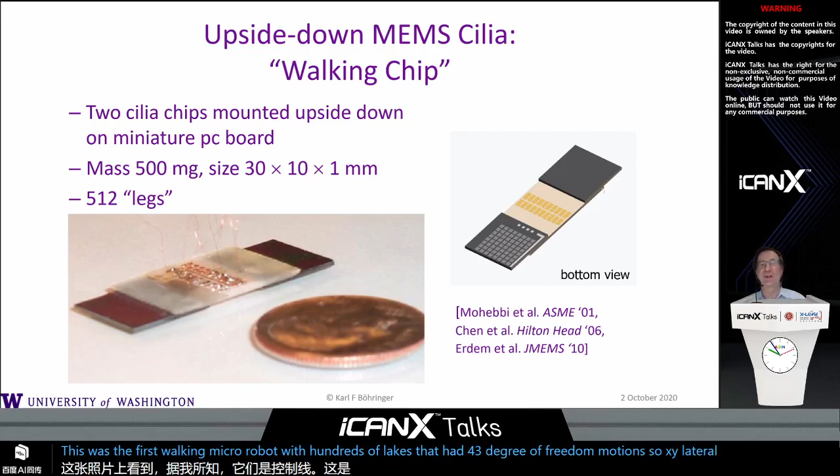How does this look like? Well, here is a little video, and you just see one corner of this robot, and you see a few of its legs, and here you can see how it's sort of crawling along the surface. It's a polished silicon surface, so you can see the reflection as well. And with these hundreds of legs that are moving in a coordinated fashion, the robot can move to the side. It can also move in the opposite direction and rotate and reposition itself.

Now, I mentioned earlier that some of these micro manipulation tasks don't really need any sensor feedback, but I wanted to take this one step beyond that and go to self-assembly. Now, I'm not a chemist at all. We saw some great work earlier in this session on self-assembly at the molecular scale. We're doing something a little bit more, should I say, crude, with silicon microchips that are usually in the size of hundreds of micrometers, possibly down to tens of micrometers.

But you can create a template where slots represent essentially the minimum energy state. And then when a wave of parts is moving over that surface, then these parts get captured in these sites and then assemble into a predictable pattern. So in this case, we have about 200 sites that capture parts.

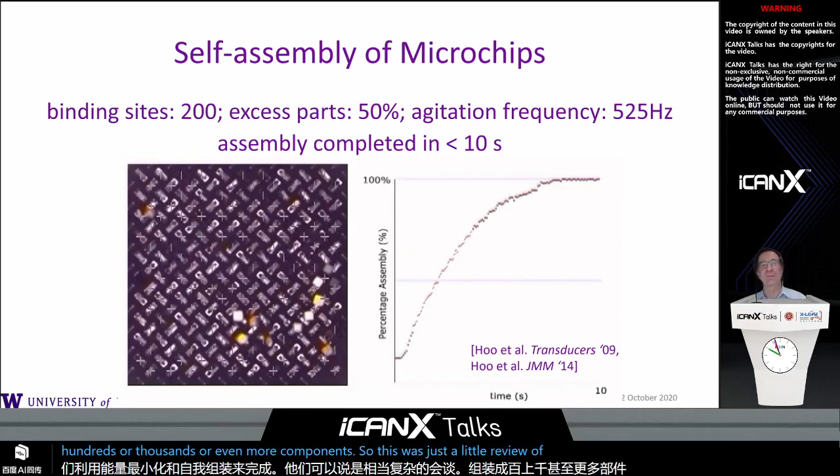So this was just a little review of some earlier work, but I think it created some of the motivation for the work today. But what I've shown you so far was work with solids and how they interact at the small scale. But for the rest of the presentation, I want to talk about the interaction between droplets and solids, so liquids and solids at the small scale.

And probably many of you have seen pictures like this before. So the lotus effect, the lotus leaves, which have this amazing property that they repel water, say, a raindrop that falls on it, and it creates this really almost perfect sphere of water that can roll off the leaf very easily. So, like many other groups, we've been fascinated by this effect, and others before us have studied this in a lot of detail, and I think there is a very good understanding now of what makes this work.

Well, if you zoom in on the surface, then you see an almost fractal-like structure of roughness. You see features that are in the tens of micrometers or in the micrometers, and even the smaller scale that makes the surface very rough. And this roughness really enables the super hydrophobic property of the surface that basically limits the amount of interaction between solid and liquid. So most of the droplet is really suspended in air, and only very few points make contact with this microscopically rough surface.

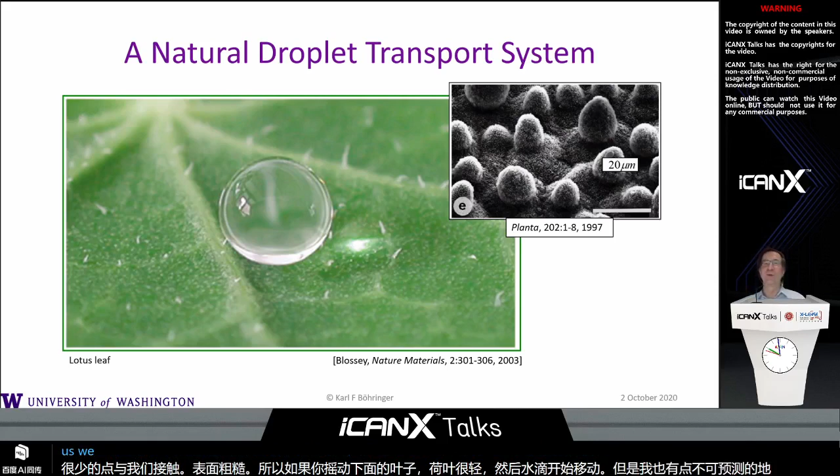So if you shake the lotus leaf just slightly, then the drop starts to move, but it's somewhat unpredictable where it would move to. And maybe in nature that's okay, but of course for us, we would like to have more control over how we move and manipulate the drops. So what we really would like to have is something like in this picture here.

The most fundamental principle or task here is how to move a drop from a point A to a point B. How would this work? Well, in general, you need some kind of gradients. You need some energy landscape that moves the drop from one position to another. So in this little animation, you're moving from the higher energy point to the lower energy point, following the gradient.

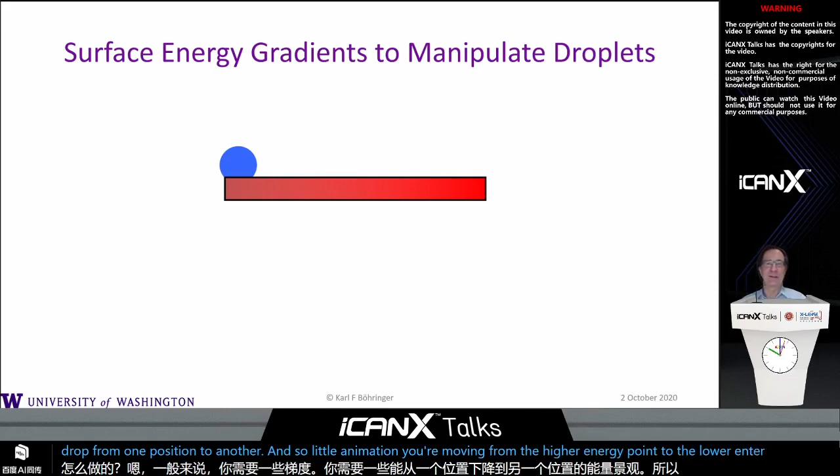Now, how can you do that in practice? Well, there are many different ways how you could create a gradient. And here are just some of the examples. And again, great work that in some cases really dates back many years. Like in this case from George Whitesides' group, almost 30 years ago, he showed that he can make drops move uphill. Now, why does that work?

Well, because there is an energy gradient, or really a surface chemistry gradient, where the lower portion of the slope is more water repellent than the upper portion of the slope. And there is sort of a gradual change of the surface property in between. So if you put a drop on the surface at the lower end, then the overall energy balance gets minimized, even though you work against gravity, but still the water is moving uphill.

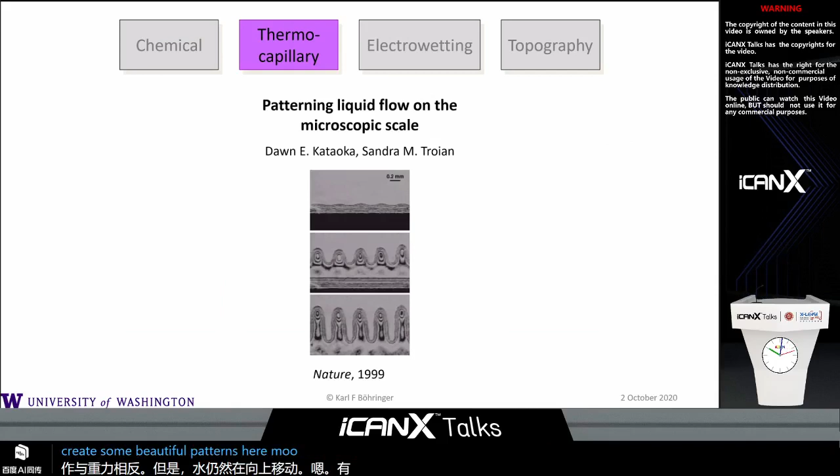There's some great work back then, Sandra Troian at Princeton, who worked with thermocapillary effects to create some beautiful patterns here of moving mixtures of liquids in different directions. And then, of course, there's work from Duke and also from other schools on electrowetting.

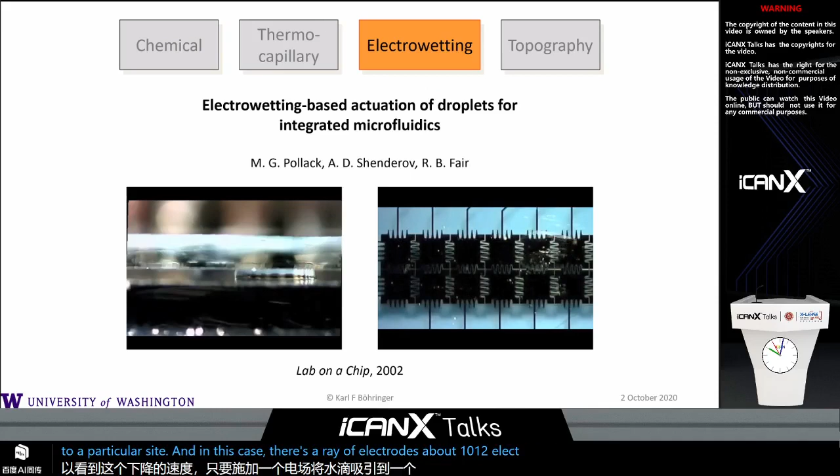So applying a voltage creates locally a different energy landscape that again moves the drop in a particular direction. Here is a side view in this video, and hopefully you could see that in a short sequence. Here is a top view, and you can also see how fast this drop can be moved around just by applying an electric field that attracts the water drop to a particular site. In this case, there's an array of electrodes, about 10, 12 electrodes in the field of view here, and you can very quickly switch between them.

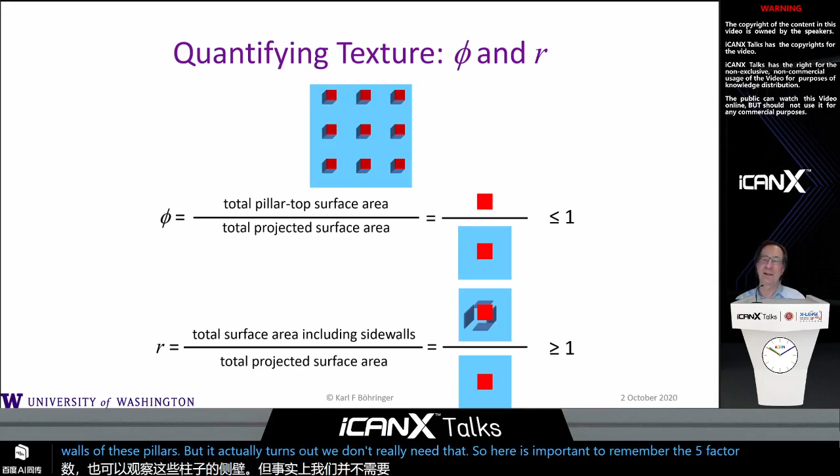If it's close to 0, it's like a bed of needles or a bed of nails. If it's 1, then it's a flat, smooth surface. So we're basically operating between 0 and 1: for 1, a flat, smooth surface, for 0 or just a little bit above 0, a very spiky surface. There's another parameter that also looks at the sidewalls of these pillars, but it actually turns out we don't really need that. So here it's important to remember the phi factor, because we need that later when I come back to my Young's equation or modified Young's equation.

Here I'm looking at the apparent contact angle. So remember from Young's equation, we had an angle theta that we calculated from the surface energies. And now I'm asking, well, what happens when I put a drop on a rough surface? Here's the equation for that. But what does this equation actually mean?

I think if you look at the graphics, it makes perfect sense, because if you have a water drop sitting on top of a rough surface where the water does not sink into the gaps, then you have basically a mixture of water interacting with a solid and water interacting with air. And what is the ratio between them? Well, it's really this factor phi that we were just talking about. So there is a portion of the water drop, and the surface area portion for that is phi, that interacts just like before with the flat surface.

But then for everything else, for 1 minus phi, you have an interface to air. And when you have an interface to air, it's like this perfect hydrophobic area. It doesn't make contact with any solid surface. So there you have a contact angle of 180 degrees. So you can simplify that, and you get an angle that is expressed by this equation, or you can then turn it again into another form.

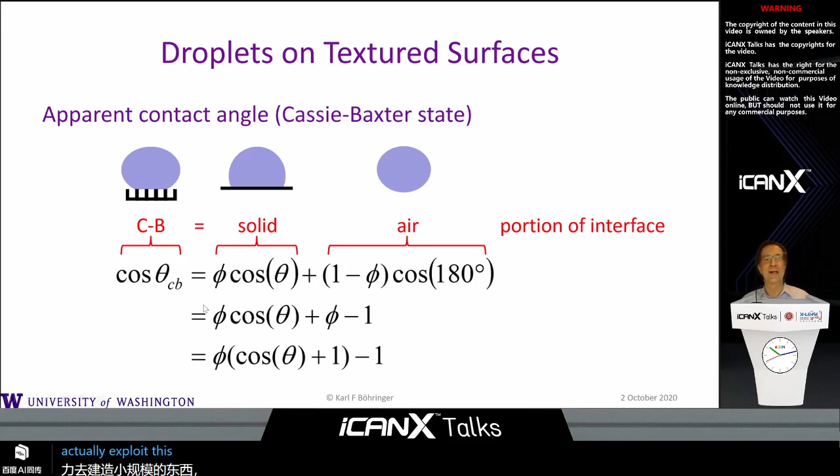Now, the colleagues Cassie and Baxter discovered this simple relationship in this equation. And again, this is many years ago. So this is not new, but now with our capabilities to build things at the small scale with very high definition, we can actually exploit this and build new kinds of systems that take advantage of this Cassie-Baxter effect. Now, I'll show you how this works if you zoom in a little bit more. So here's our Cassie-Baxter state, and I'm going to zoom in on one particular area. And you see the interface here, solid-liquid, and then also liquid-air.

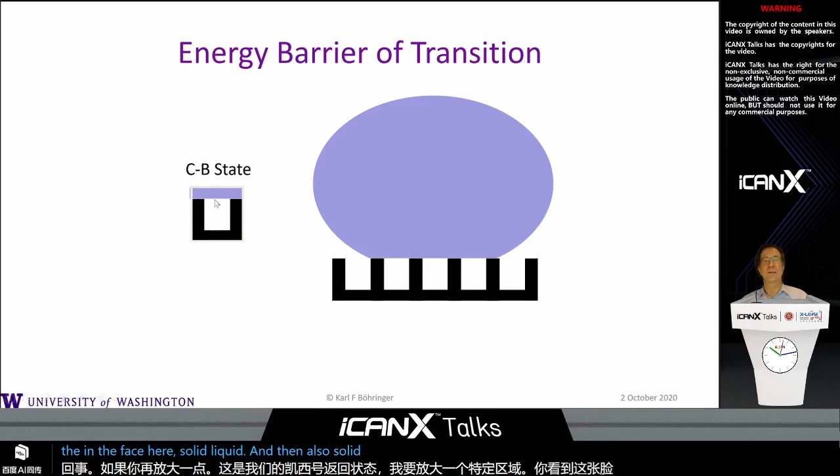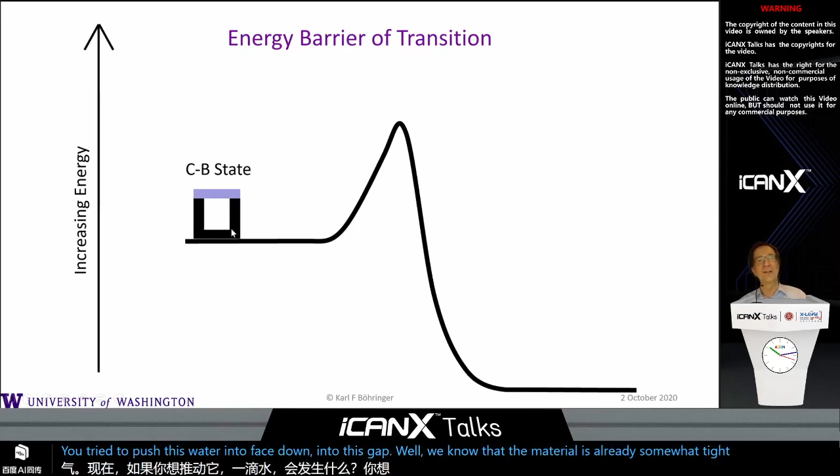Now what happens if you try to push this water droplet, if you try to push this water interface down into this gap? Well, we know that the material is already somewhat hydrophobic. So we have to apply some pressure. We have to exert some energy to push this water into this gap. So there's an energy barrier that naturally, if you let the system sit, it would not attain. It would stay in the Cassie-Baxter state.

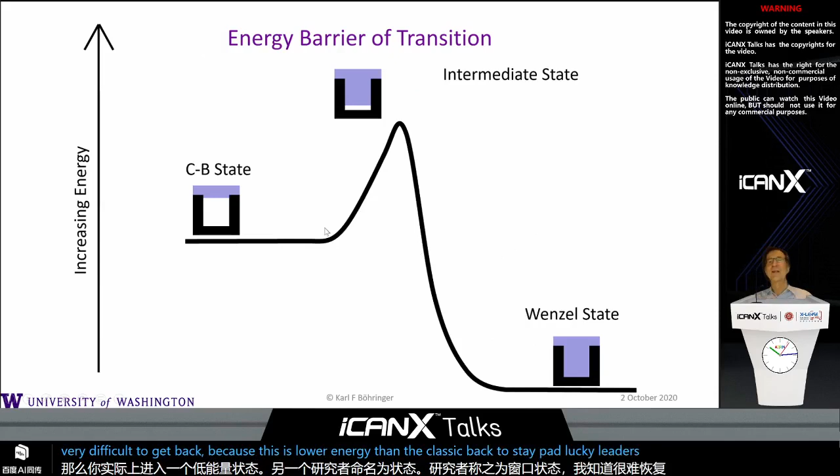But if you completely eliminate these interfaces, so the air-water interface and also the air-solid interface, so you remove the air completely, then you actually get into a lower energy state. And this state is named after another researcher. It's called the Wenzel state. Now, it's very difficult to get back because this is lower energy than the Cassie-Baxter state, but luckily there's this barrier in between. So what I would like to do is to stay on this side of the equation. That's what I will be showing you in the next couple of slides.

So here are just some more pictures. This was done with a goniometer where we actually study the surface contact angles. And here you see the drop sitting on this bed of nails, while here we're pushing the drop into the rough surface, and here we have attained the Wenzel state. But both of these states, Cassie-Baxter and Wenzel, are stable.

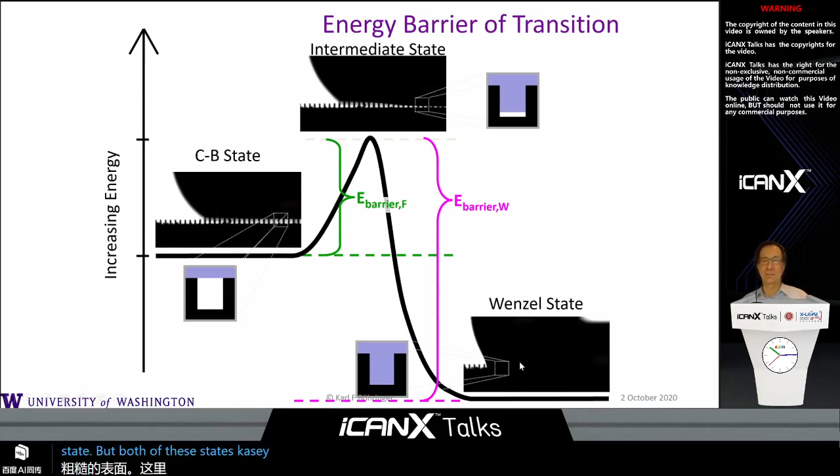And now, again, I want to take this a little bit further, and at this point I'm actually designing a rough surface. Now, what are the tools that I have available? So in my microfabrication facility, I can define these geometries, and I can create pillars that have a certain height. They have a certain geometry with a gap b and an actual size a. So if I look at this geometry, how does this relate to phi? Here's the equation for that. So a squared over (a plus b) squared gives me this parameter phi.

And now remember the equation from Cassie-Baxter. It tells me the apparent contact angle is a function of phi. The theta is, of course, given by the materials. So I can play with phi here. And what happens if I change this from a flat surface to a very spiky surface? Well, I'm changing at the same time this apparent contact angle from the original angle all the way to 180 degrees, at least in theory. In practice, of course, I have to stop a little bit before reaching zero. But this basically tells me a way to make a gradient of texture or a gradient of hydrophobicity on the surface.

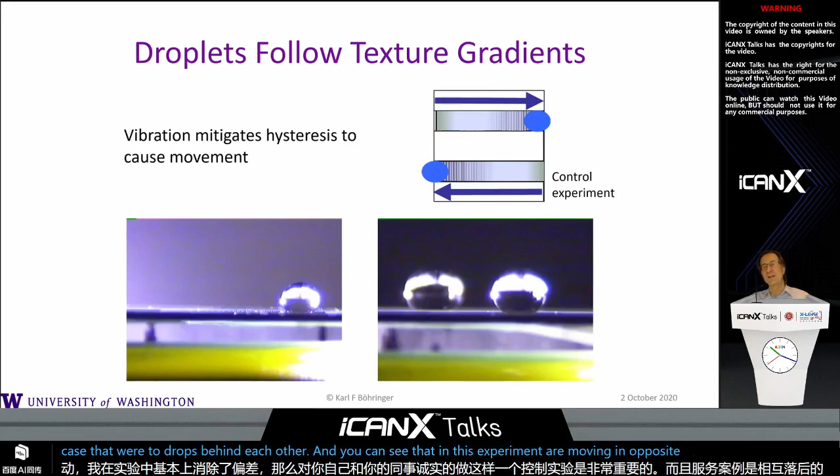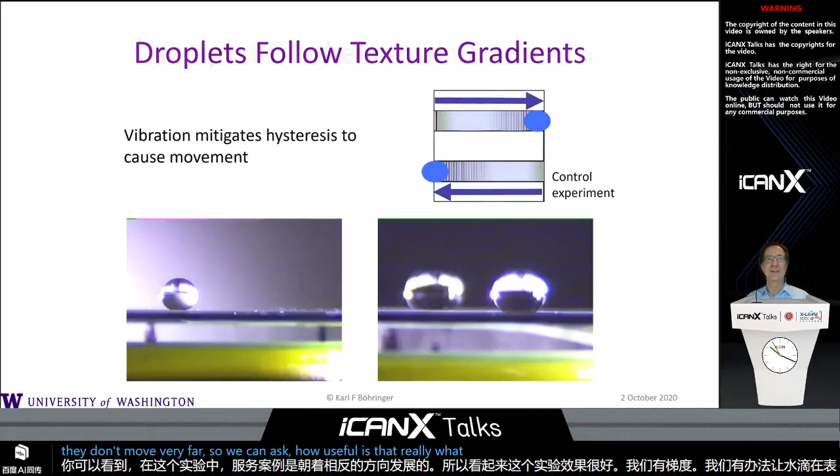It seems like this is working great. We have gradients. We have a way to make drops move on a surface just by texture. But unfortunately, well, they don't move very far. So we can ask, well, how useful is it really, what we've just built here? And this is definitely a limitation of these gradients.

So you first of all have a limited distance along which you can move the drops. And of course, you cannot create anything like a closed loop because, well, that would be against the laws of physics if you want to follow a gradient. So what can we do to improve on that? We can build something like what we've seen earlier from my colleague Heiner Linke, who built this Leidenfrost ratchet.

So we're building a texture ratchet. So we're building lots of small patterns that are like these gradients, but we arrange them in a clever way so that the drop moves from one gradient to the next one, and it doesn't move back. So we give it a bias so that the drop keeps moving along this repeated pattern of gradients, which then acts like a ratchet.

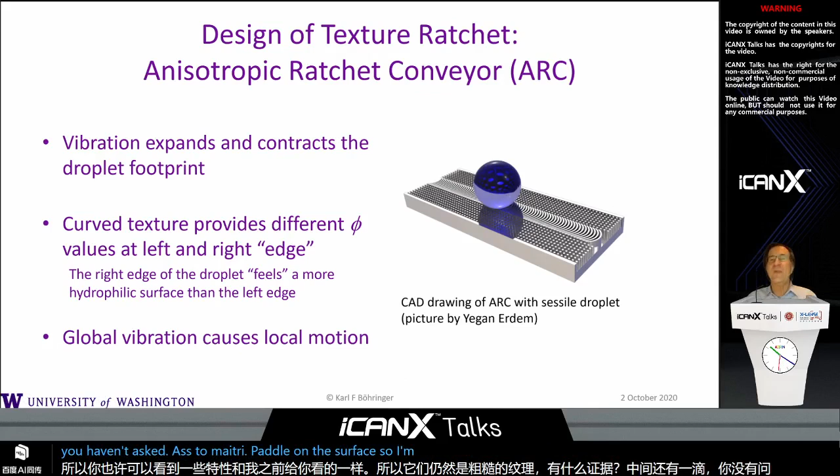Now, how does this work? Here's a video with a high-speed camera, and I very much hope that you can all see that as smoothly as on my screen. But what you'll see here is the vibrating surface and the drop that's sitting on this track. And with each cycle, and we're going at about 50 Hertz, the drop is moving a little bit towards the right. And it's doing that just because of this ratchet pattern on the surface, because of the asymmetry that we've created on this surface.

So you can characterize that, you can study this in detail, and you can essentially see that the front and the back edge, so we call it the leading and the trailing edge of the drop, they basically have some kind of oscillating pattern, but with each oscillation, the drop essentially is taking a step forward. So the asymmetry on the surface is translated into a lateral force, into a lateral motion.

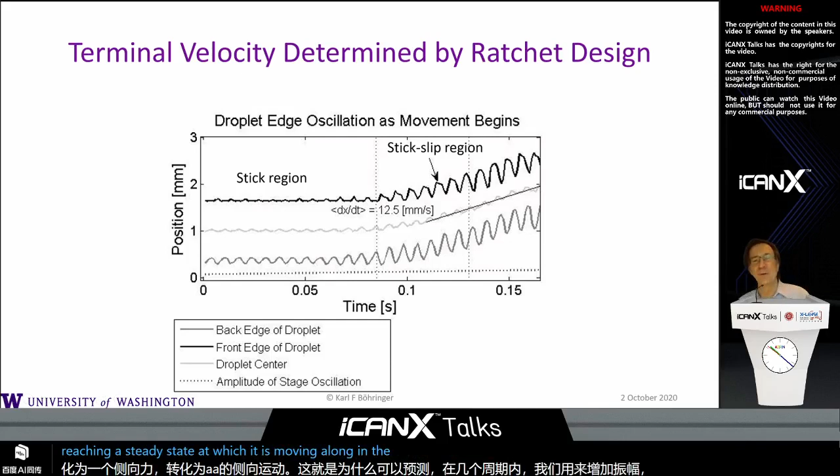And it's very predictable within a few cycles as we increase the amplitude. The drop is reaching a steady state at which it's moving along, in this case, with about 12 millimeters per second. But you can actually do a lot more with this system, even though it's very simple. I mean, you can build this in a few hours, or maybe you can mold it in a few seconds, really, once you have a master mold.

But you can, for example, build systems where different drops can be addressed with different frequencies. So it's well known that drops essentially have resonance frequencies, just like any spring mass damper system. And bigger drops have lower resonance frequencies than smaller drops. So if you use a low frequency, then you can reach drops that are, like in this case, 13 microliters in volume. If you go to higher frequencies, then you can address and control drops that are maybe 5 microliters.

And in this plot, we're characterizing the regions in which the drops are moving. So large drops at about 45 Hertz, the most efficient movement for small drops at about 80 Hertz. But if you have an intermediate drop, then there's some overlap. So there's a capability to address drops on a surface just by using different frequencies. And these pictures show some of these examples.

So the first one shows just moving the 5 microliter drop towards the 8 microliter drop. And then we're changing the frequency and we're moving the mixed drop along that track. So first we do mixing and then some merging with the vibration. And when we change the frequency, we lower the frequency from 75 to 45 and the drops are moving together.

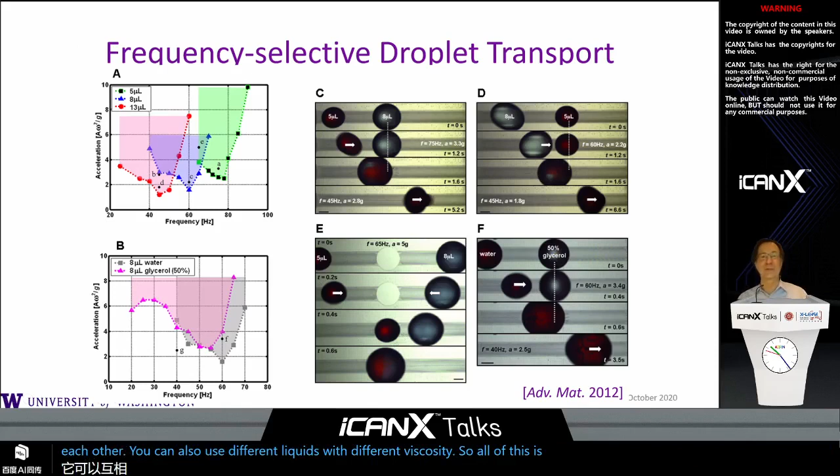Now you can also do things like, for example, what you could think of as some kind of microfluidic circuit where the drops initially move in an asynchronous way. So they're moving at different paths, they maybe arrive at different regions, but then you can modify these regions so that it's a little bit harder for them to move across them. And when you change the amplitude or you change the frequency, then you essentially synchronize the movement of the drops and let them all move on, like in this moment now, that they move together even though they arrived at this site at different times.

So here's another example where you can essentially build a switch for drops. And again, it's the same drop, it's the same pattern on the surface, but in one case the drop turns towards the right, in one case it moves straight, because we're using different frequencies that essentially create different resonances in the drops. And for this higher frequency, the lower frequency, the drop is taking a right turn.

So this was done by my student Hal Holmes. He had some great work on these microfluidic circuits that he's been building. And he's actually now still in Seattle, but working in a startup company and the overall theme of conservation biology.

I think one more example on that, where you can have a selective mixing and merging of drops. So there is an area where drops are joining, but in some cases, like on the left, we're holding back the drop. We let the other one pass, but with a different input signal, we actually mix the two drops together. So lots of these functionalities are all capable on this platform. So very simple platform, only texture and nothing else. Lots of capabilities here in making interesting microfluidic devices.

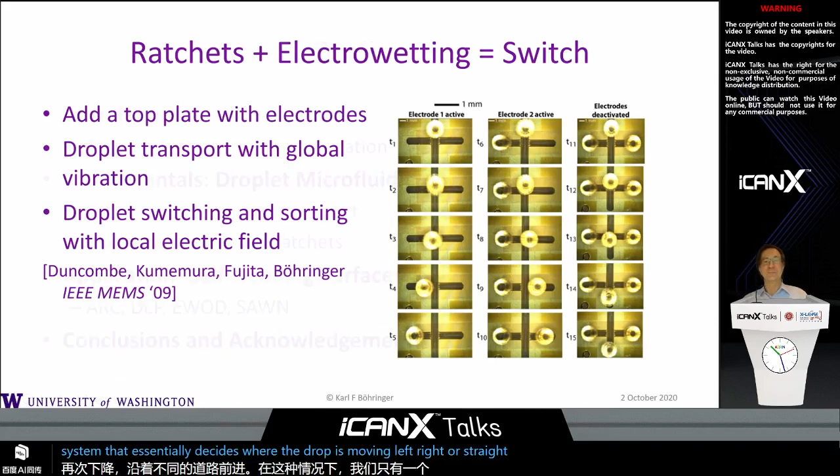And now, these were the fundamentals that I wanted to show you, but now for the remainder of my presentation, I want to talk in more detail about one particular application, and I want to highlight my student Di Sun. I mentioned his name earlier. He worked on this particular application of self-cleaning surfaces, and he was really great. He's been very productive, wrote a lot of papers that actually just came out over the last year, and was also very good at introducing different acronyms into the collection here.

I've already talked about the anisotropic ratchet conveyors, or ARCs. He also worked on electrophoresis or dielectrophoresis, on electrowetting on dielectrics, and on surface acoustic wave nebulization. So all of that was done on the same platform, and in particular, we're interested in exploiting this effect for self-cleaning surfaces. So let me show you what we want to accomplish here.

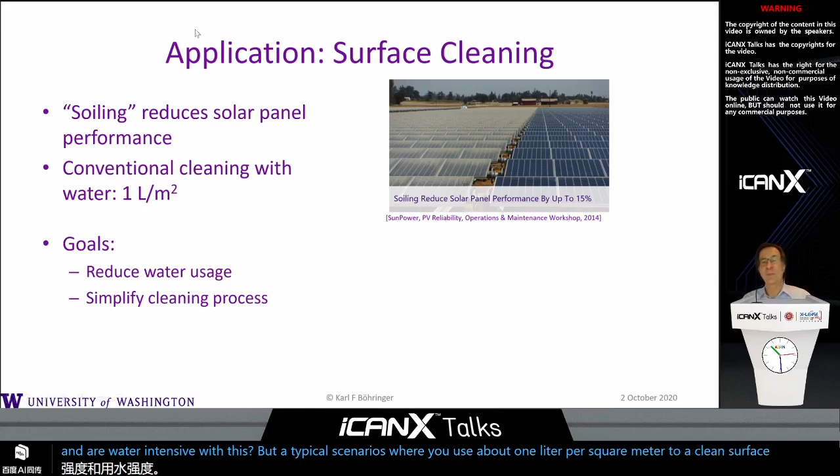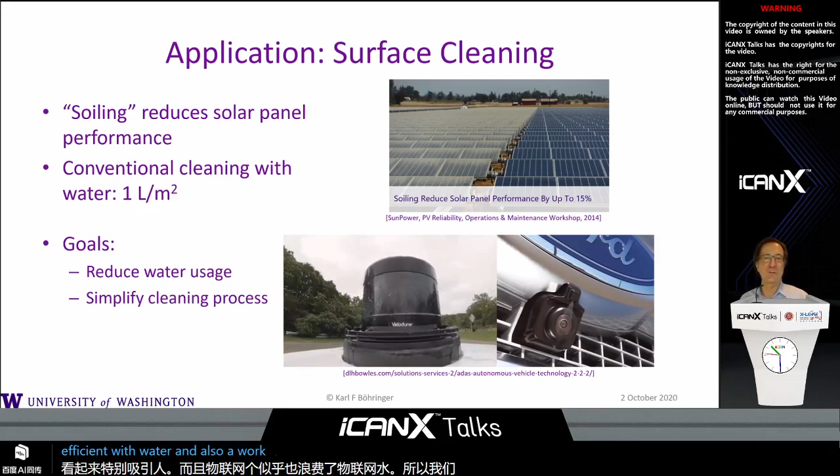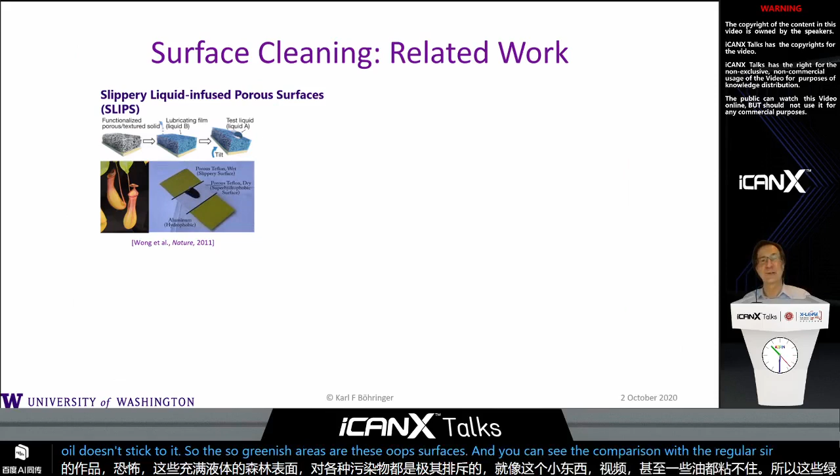How can we do that? Well, first we looked at the literature, and there's some beautiful work out there. For example, the work by Joanna Aizenberg at Harvard that had these liquid-infused porous surfaces that are extremely repellent to all sorts of contaminants, like in this little video where even some oil doesn't stick to it. So the greenish areas are these SLIPS surfaces, and you can see the comparison with a regular surface that is not treated, where the oil is sticking much more.

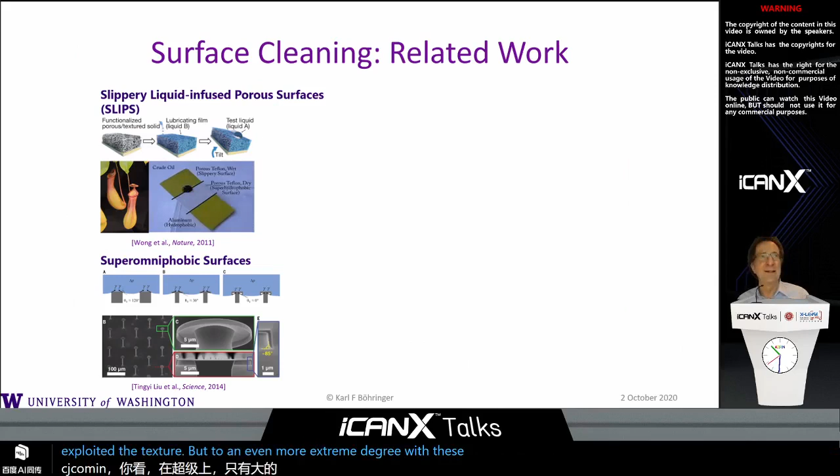Beautiful work also from C.J. Kim at UCLA on these super omniphobic surfaces that also exploit the texture, but to an even more extreme degree with these overhanging, mushroom-shaped features. And then in general, with superhydrophobic surfaces, like here is a product that you can actually buy where a droplet is moving over a surface and essentially collecting the contaminants that are sitting on this wafer. The drop is basically moving in a random fashion, depending on the human that's controlling it.

And then some beautiful work that just came out a few months ago of, again, some textures, some rough surfaces, but very durable ones. And that's really a topic that is very important, especially when you talk about solar panels that are exposed to the elements often for years or longer.

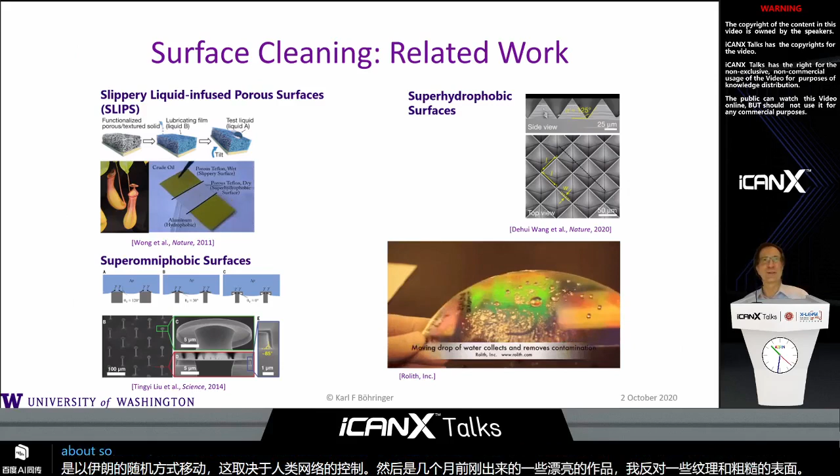What was our take on that? Well, we modified our anisotropic ratchet conveyors and made them flat, at least from an optical transparency point of view, so that we simply made some regions that are more or less hydrophobic, but other than that, the surface is essentially flat. When my student initially proposed that to me, I said, no, that's not going to work. You need the topography, you need the pillars and the physical roughness. But he went ahead anyway, and he came back a few days later, and well, he got it to work.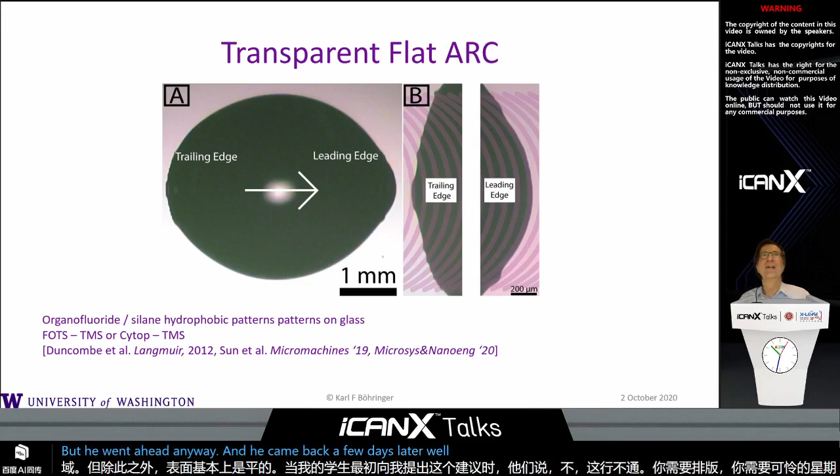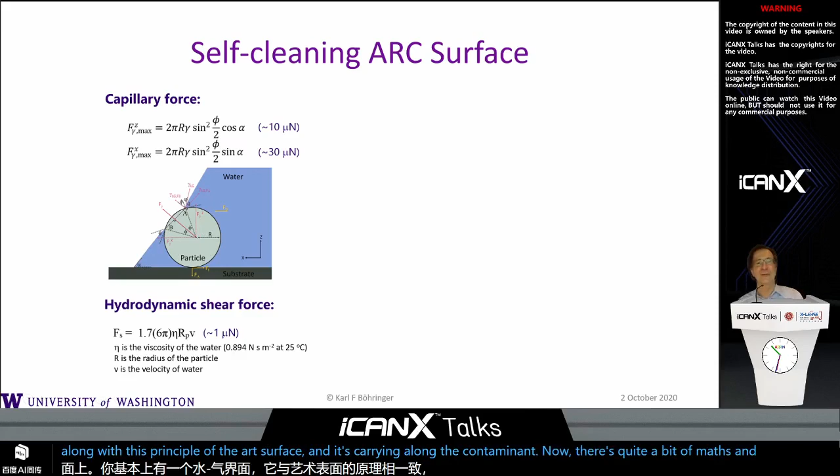This is what we want to do ultimately then, that you have particles sitting on the surface, and on the surface you have essentially a water-air interface that is getting pulled along with this principle of the ARC surface. And it's carrying along the contaminant. Now there's quite a bit of math, some modeling that you can do that I'm not going to go into in detail right now, but the ultimate effect is something like in this video that you're seeing here. This is a 10 microliter droplet, and it's carrying a few grains of sand. It turns out that you can actually load these drops with a lot of sand, up to 50% or more in weight, and the effect is still working, so you can still move the drops along.

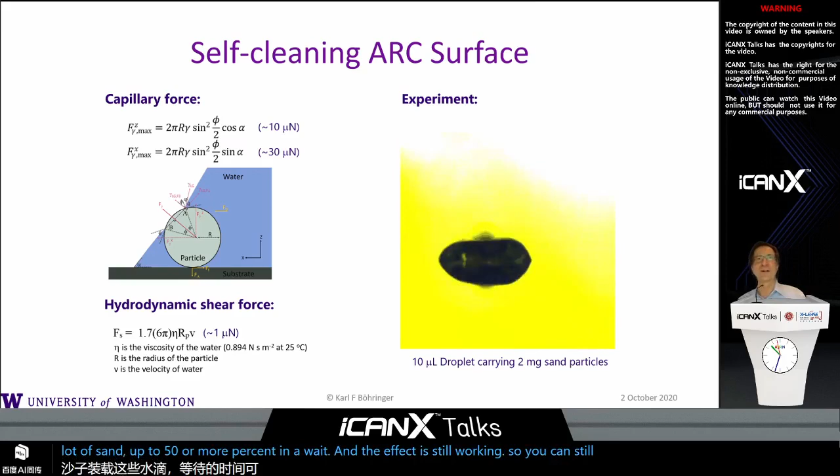Here's the experiment that I wanted to show you, and let's see. The video started with the first experiment already done, but I'll just let it run here. And what you see here is that the drops are following this invisible, flat ARC pattern that we created on the surface. It's transparent, it's essentially invisible, but the drop basically knows where to go. It follows this track and it picks up the dirt along the way. Within about 10 seconds, it has picked up all the dirt in this area, and now it's slowed down because it's loaded with all these contaminants, but it keeps moving along this, well, I shouldn't call it a circular track, but it's a loop.

Well, I guess here it goes again, but I'm just telling you a little bit more what we wanted to do with that. There are several publications that have come out over the last couple of years, but what you're seeing here is one 10 microliter drop that cleans about 1 square inch, about 5 square centimeters, and it does that in about 10 seconds.

So if we do a simple extrapolation, then we can ask, how long does it take to do a 2 square meter surface? Well, we wouldn't do that with one drop, but you could actually do that with 100 drops. So you multiply 10 microliters by 100, you get 1 milliliter. That would take about 40 seconds according to this calculation. So compare that with what's currently being done, where you need about 2 liters for cleaning a solar panel of 2 square meters. Now with this principle, we could do this with about 1,000 times less water.

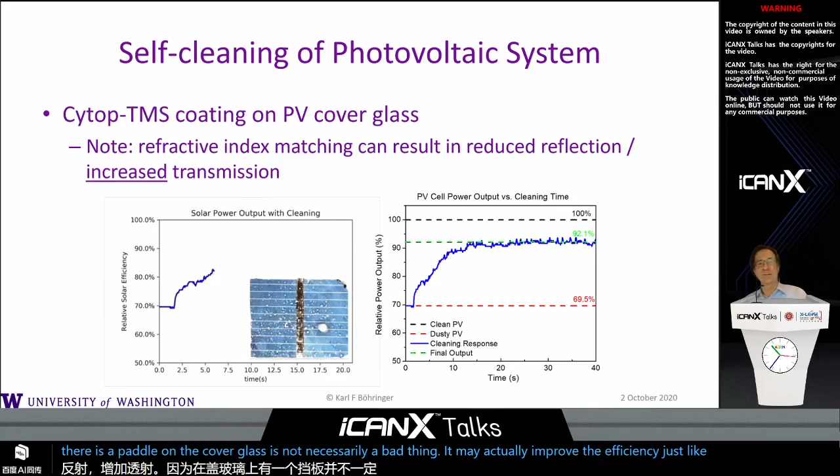Now it turns out that under the right conditions, when you pick the right materials for this arc track, then you can actually get even an improvement in efficiency, because you can do the refractive index matching that reduces reflection and increases the transmission. So the fact that there is a pattern on the cover glass is not necessarily a bad thing. It may actually improve the efficiency, just like any anti-reflective coating would do.

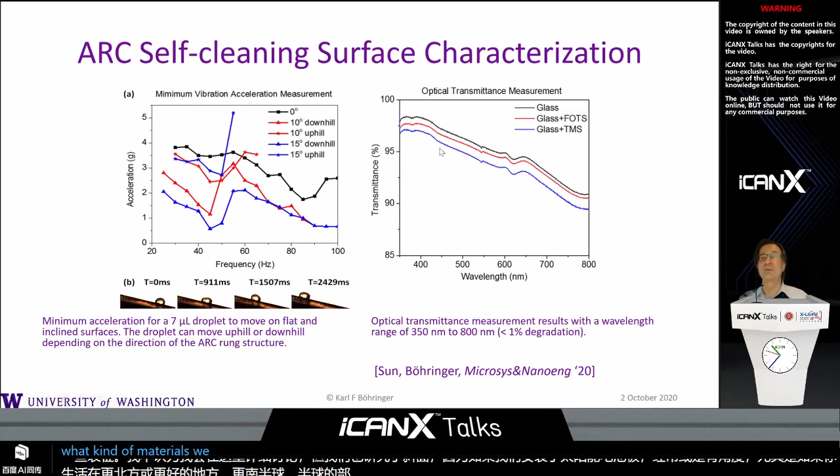So now you can do some characterization on that. I don't think I'll go into a lot of detail here, but we looked at sloped surfaces as well, because if we have installations of solar panels, often they're at an angle, especially if you're living in more northern or more southern parts of the hemisphere. So it can also work on sloped surfaces, and depending on what kind of materials we use, we may or may not lose or even gain some of the efficiency in the transmittance.

So far I've shown you this principle with vibrating surfaces. So you actually have to give it mechanical movement. And of course, that may not be an ideal solution for solar panels. You don't want to shake the entire system, even though it turns out that the frequencies that you need, 40 to 60 hertz typically, are often the kind of mechanical vibrations that you get in large installations. For example, if you look at cars or at planes, the vibrations usually peak in this range of around 60 hertz. So you could possibly design a solar panel so that it naturally vibrates at those frequencies.

But what if you don't want to have any kind of vibration in the system? Well, you can use electrowetting instead. So here's the principle for that. You would have embedded electrodes, and you're applying an electric field, and depending on the strength of the field, the drop will change its shape. And in combination with this arc pattern, you can again make the drops move.

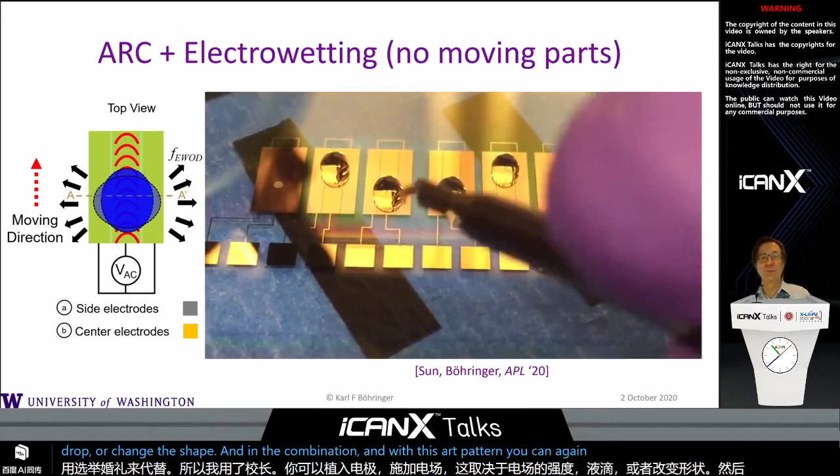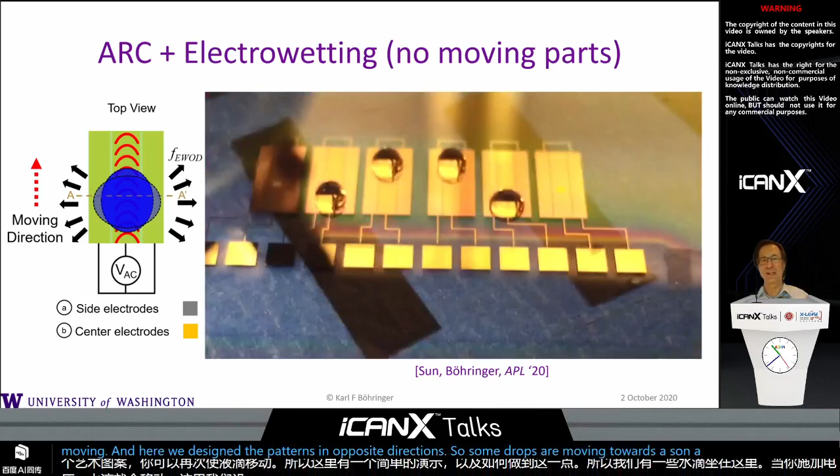So here's a simple demonstration of how this can be done. We have some drops sitting here, and when you apply a voltage, the drops are moving. And here we designed the patterns in opposite directions, so some drops are moving towards us, some others are moving away from us. And these voltages are usually in the single volt range or in the tens of volts.

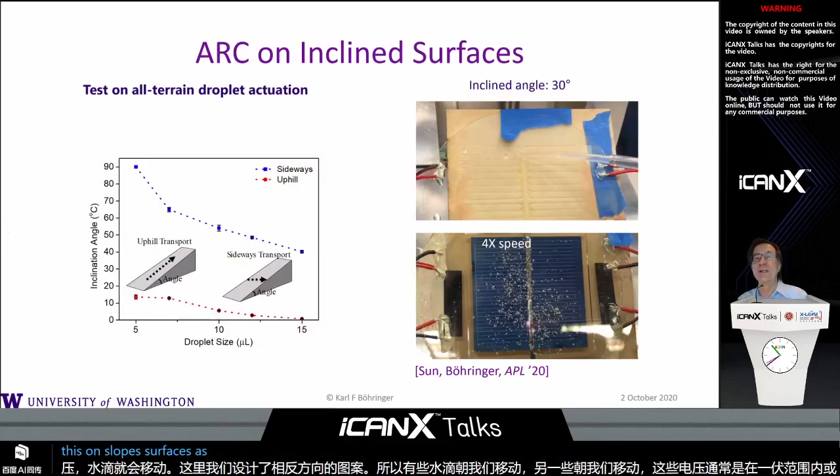And as I already mentioned, you can do this on sloped surfaces as well. So hopefully in this video you can see a system with an inclined angle of about 30 degrees. You can see that each row carries one drop. The idea was that once the drops are on the side, they eventually collect, and when they combine, they become too heavy to stick, and they just fall off the panel. So that would be our cleaning principle in general: we just let the dirty drops fall off the panel and then supply more drops for cleaning.

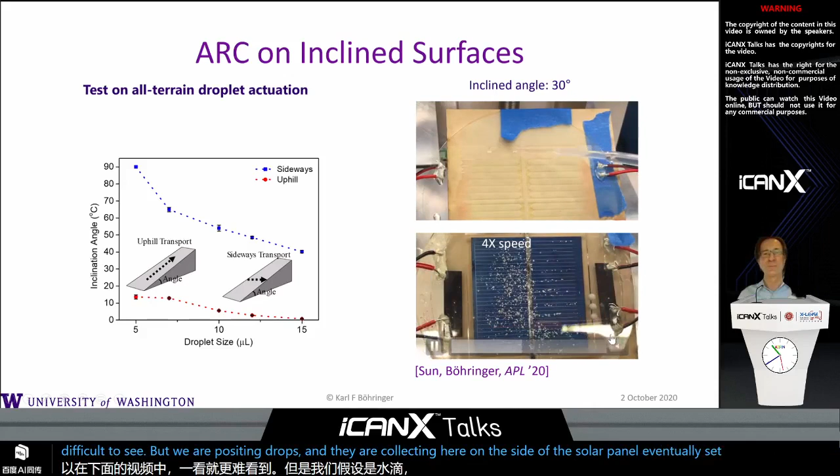Here in the lower video, a little bit more difficult to see, we're depositing drops, and they're collecting here on the side of the solar panel, and eventually they'll fall off the system. And there are actually many other things that you can do with the system, and in the remaining few minutes I want to show you a couple other ideas.

So far I've shown you frequencies that are in the 40 to 60 hertz range typically. But you can actually also work with much higher frequencies, and then you get into a regime of liquid dielectrophoresis. This may have some advantages, especially if you're worried about electrolysis. You don't want to break down your water drops into oxygen and hydrogen.

And we actually had some conversations with Blue Origin, the company that's building a spacecraft, and they're very worried about their passengers who have beautiful large windows, but they're worried that the windows actually fog up, and they're looking for techniques on how to keep the windows from fogging up, because if you pay, I don't know, how much does it cost, $500,000 to spend 1 minute in space? You don't want to sit behind a foggy window. So how do you get the condensation off the window? Well, here's one possible solution.

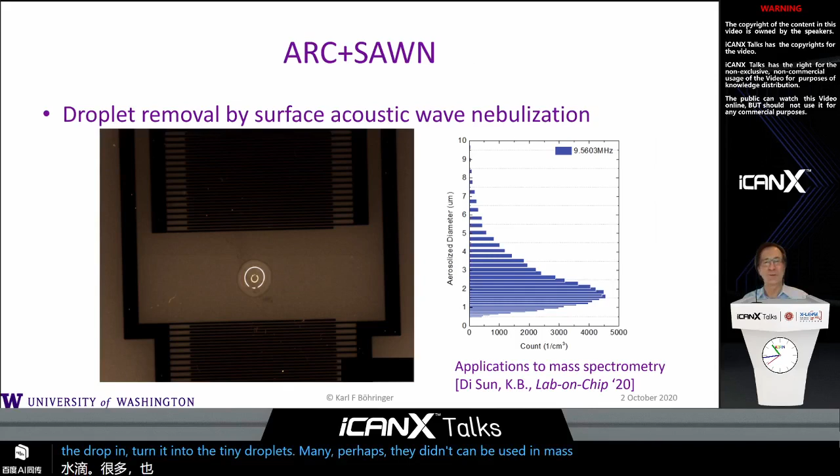So here's an example of the drop that has already been transported to this particular site. Again, the arc track on which it has traveled is invisible here, but you can see the electrodes for the SAW device. And in the video, you see the nebulization process where the drop that was just peacefully sitting there in the center then suddenly turns into lots of tiny drops that are then processed in the mass spec instrument.

So I thought this was maybe a good way to reach the end of my presentation here today. So essentially, ending it with a bang where we're blowing up things, and that's always fun to do in an experiment where you see some exciting things happening at the small scale on our chips. And in this case, we could even see how many drops are being produced at different size scales. And you can see that the diameter sort of peaks at about 1 to 2 micrometers.

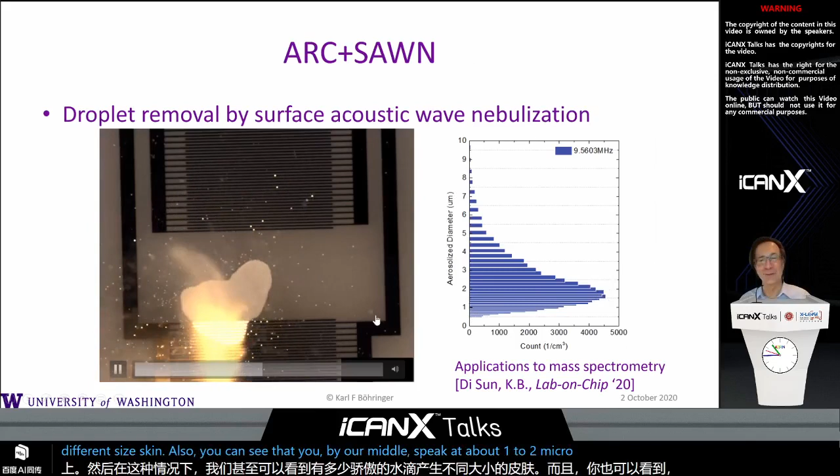So I hope that this was interesting for everybody here with several different applications of droplet manipulation and in general with interactions and magic at the small scale on surfaces. I do want to maybe just make a few points to summarize my presentation here. Hopefully there's not too much text, but in general, I think we can still learn a lot from nature and apply it to new kinds of engineering systems.

So in particular, we looked at the lotus leaf, but then modified and in a way improved the principle to actually have a system where we can very controllably manipulate small amounts of liquids. We applied that to self-cleaning of surfaces, but more generally to essentially a particular kind of lab on a chip platform where you can do moving, sorting, mixing, merging, all on this very simple device that essentially just uses texture and either vibration from mechanical agitation or from an electrical field.

The self-cleaning surfaces are still a work in progress, but we believe that we can produce much more efficient ways of making solar panels clean, and also look at other applications, for example, cameras that are in hard to reach places that you would like to keep clean over long times. So lots of exciting things happening there right now, but there are also some challenges, and that's maybe something for the entire audience, and I'm very happy to collaborate with colleagues here.